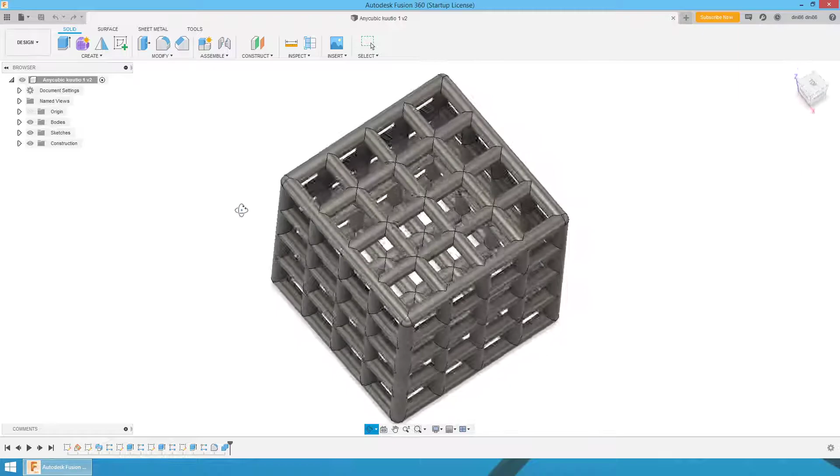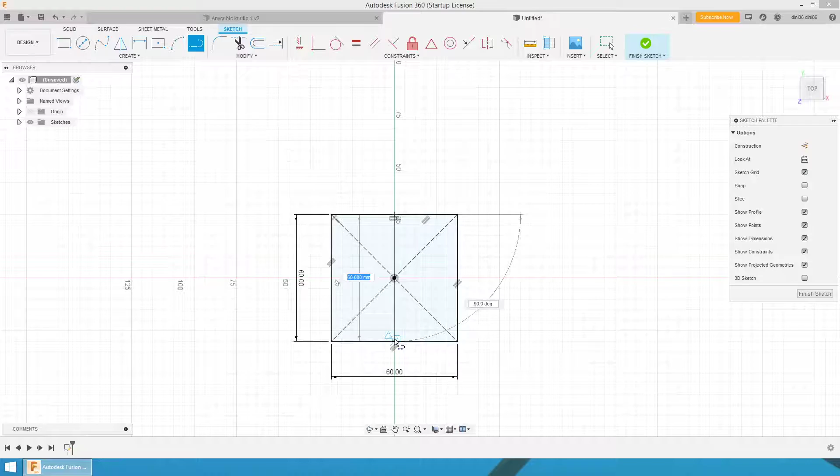And here is the finalized result, which we will try to replicate. So we start by making a drawing, a rectangle. I will make it 60 by 60 millimeters, and then we need to put a line in the middle like this. Finish sketch.

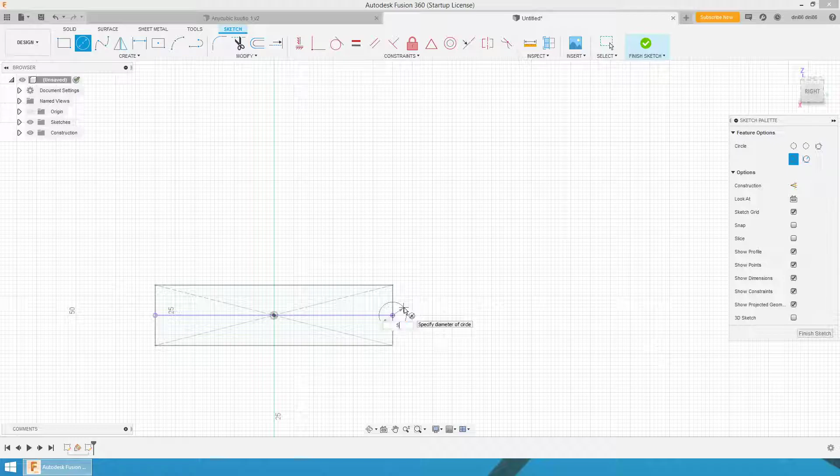Then we need to do a plane at an angle, and we will do it on this line, and then 90 degrees. Okay, and then another sketch on this new plane, and I will project, press P, and this line. Okay, I want the cube to be 5 millimeter, all the wires, so I make a circle which is 5 millimeters in diameter. Finish sketch, and then let's do a sweep.

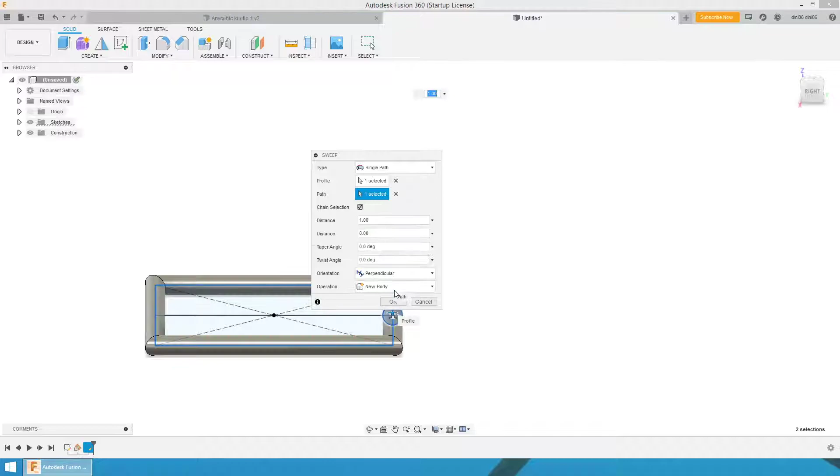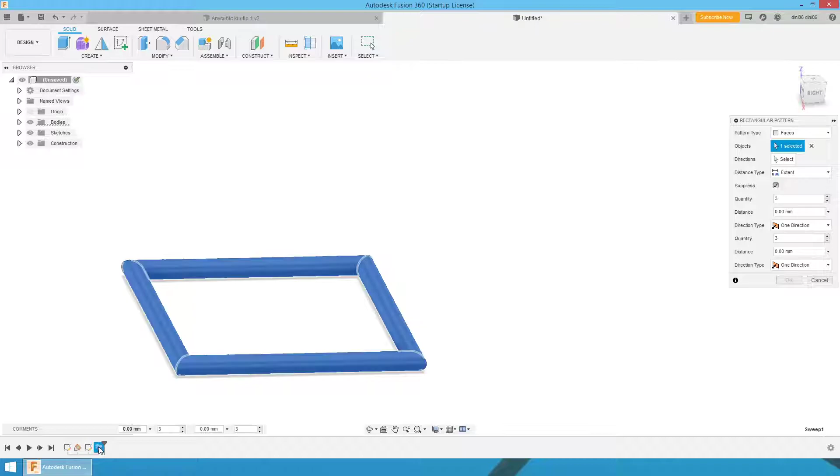So profile, we select this circle, path, this one. Perfect, like this. And we have 5 rectangles per side. So then we will do pattern, rectangular pattern. We will use this one as object, direction, up, and we want it to be 60 millimeters and 5 pieces. Okay, like this.

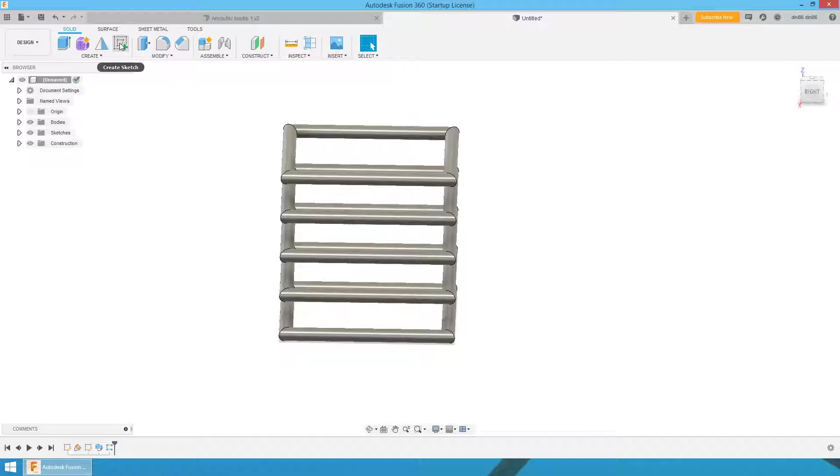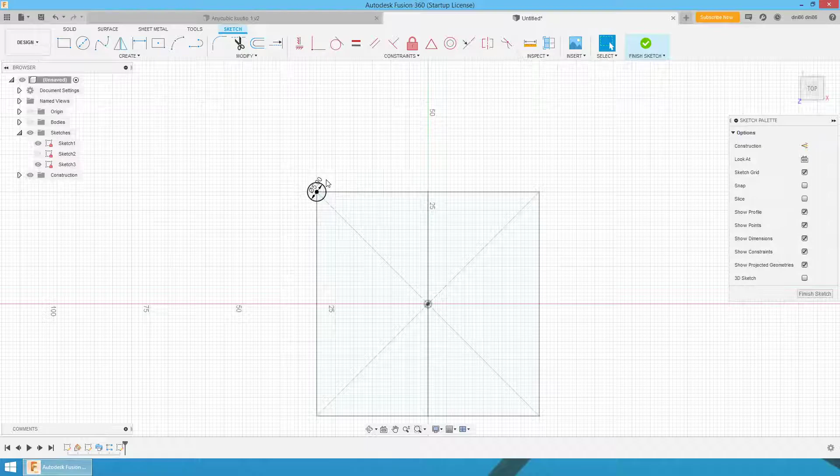Then we'll do another sketch on this same plane as where we started. We can hide the bodies, and then let's take the first sketch out like this. Then we will project again that point. Okay, and then do another 5 millimeter circle like this. Finish. And let's take the bodies back and then extrude this circle 60 millimeters. And now Fusion wants to cut it, so we need to change it to new body.

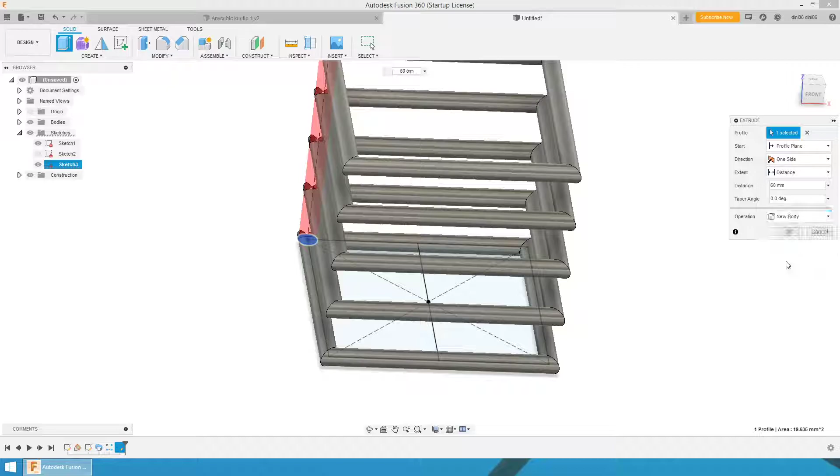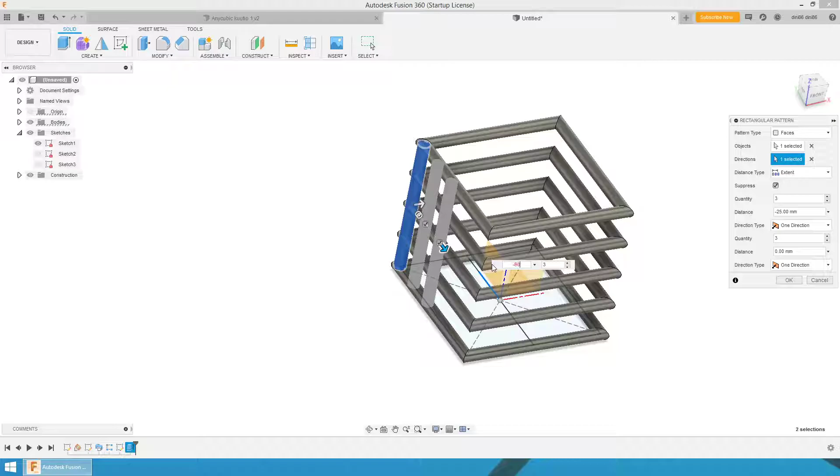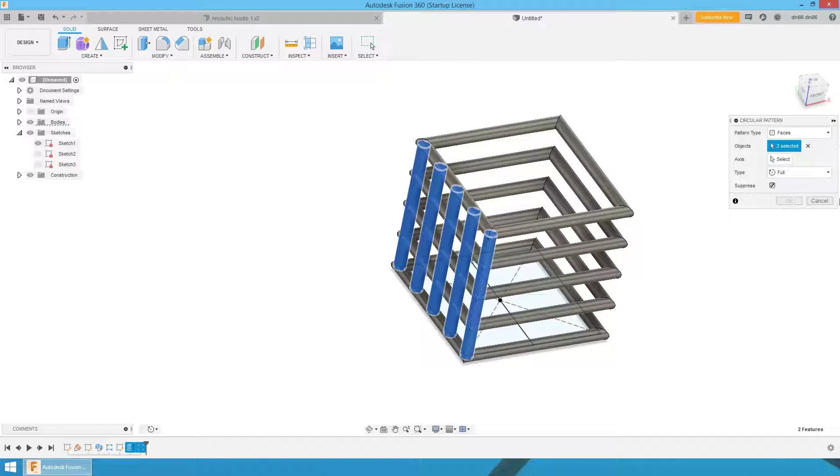Okay. Now we have one side, but we want to have many sides, so we will do a pattern, rectangular. Let's choose this one, direction. We want it to be Y direction, and then minus 60 and 5 pieces like this. And then to get it all the way around, we will do pattern again, circular, objects, this one and that one, axis, Z axis, 4 pieces. Okay, wow, look at that.

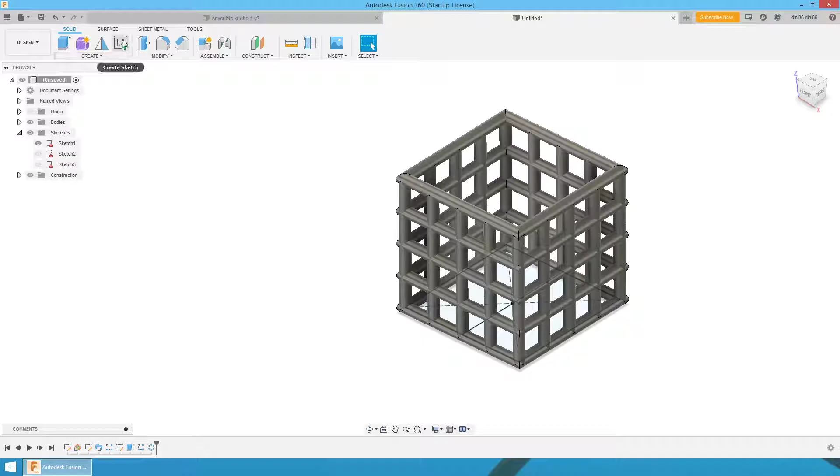And then we need to do the bottom and top. So let's do a sketch, and let's choose this plane. Okay, and then we need to project again this one. Okay, and then to make it easy, let's do a pattern again. Let's choose this one, minus 60 again, and 5 pieces like this.

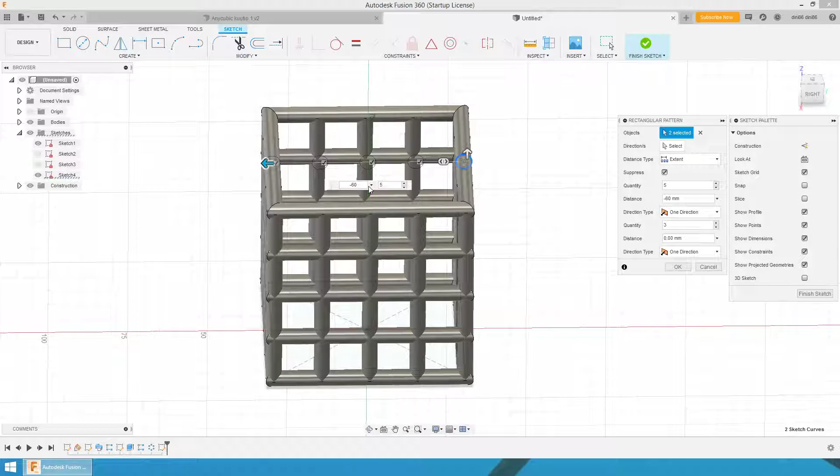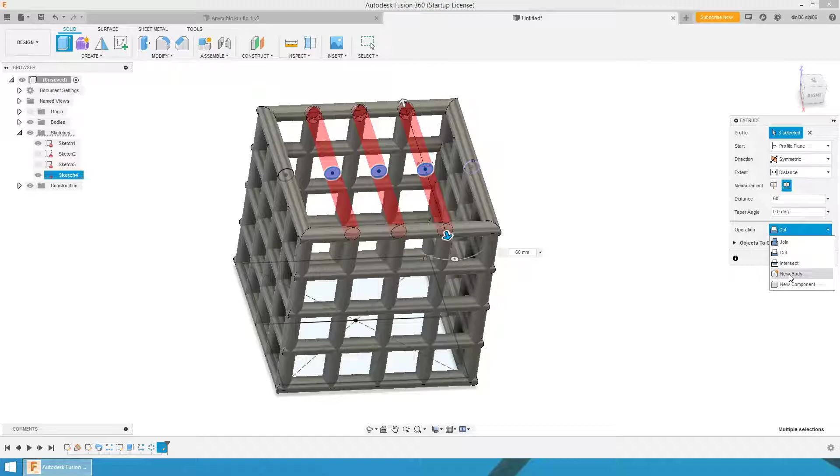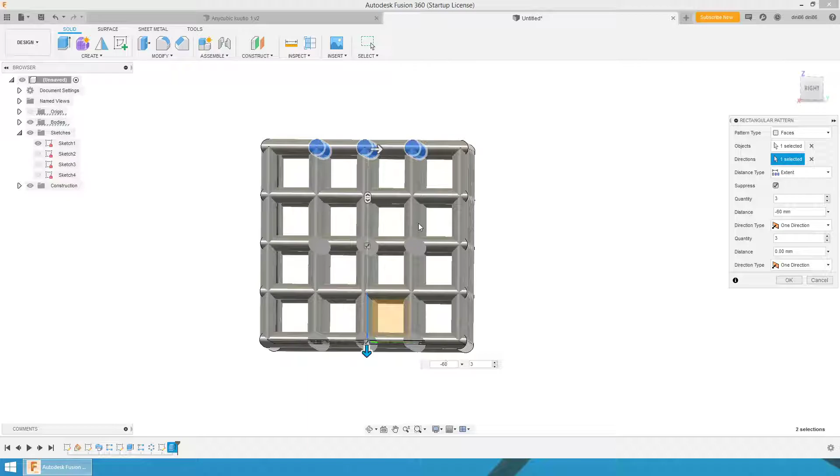Okay, finish, and then we will extrude this one, this one, this one, and we want it to be symmetric, and we want to use the whole length, and as you guessed, 60 millimeters. And again we want to have new bodies. Okay, and then we will do pattern again. This is quite easy. We choose the new one, direction, the blue direction, and as you guessed, -60 and 2 pieces. Okay, check it out, it's almost done.

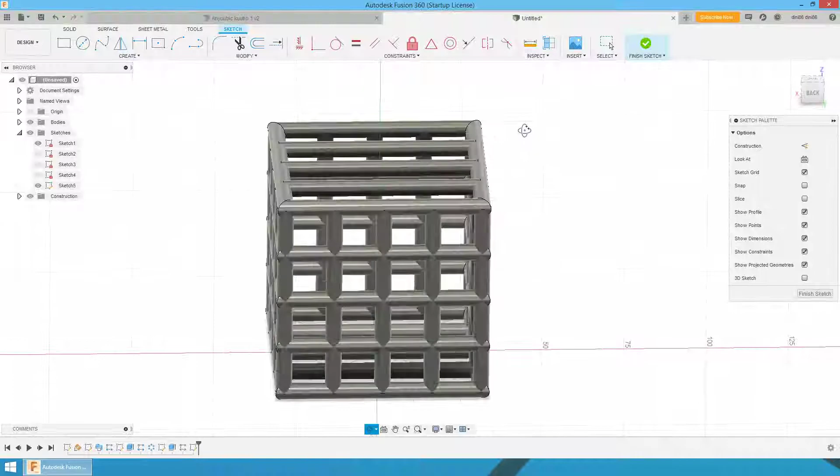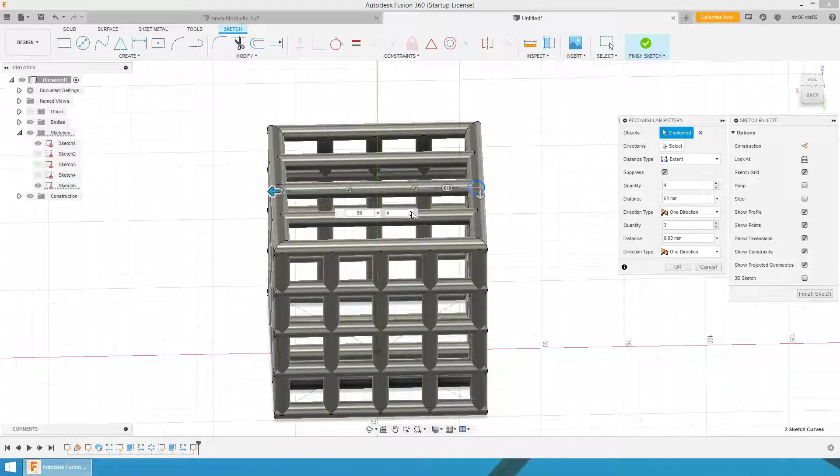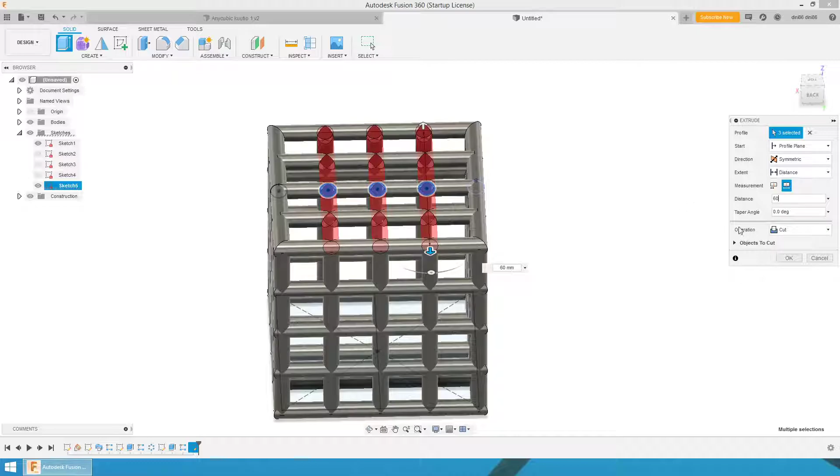Then we do these bars, so a sketch again. Let's choose this plane, and let's do the same as before. Project one of the legs. Okay, then create rectangular pattern, choose, and then 60 millimeters and 4 pieces. Okay, finish sketch. Let's choose them. This one and this one. Symmetric, whole length, and 60. And then again, new body. Okay. And now it's starting to look good.

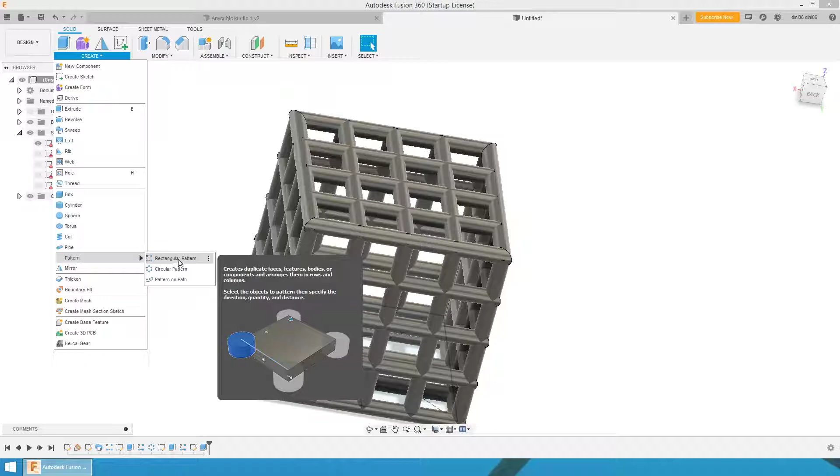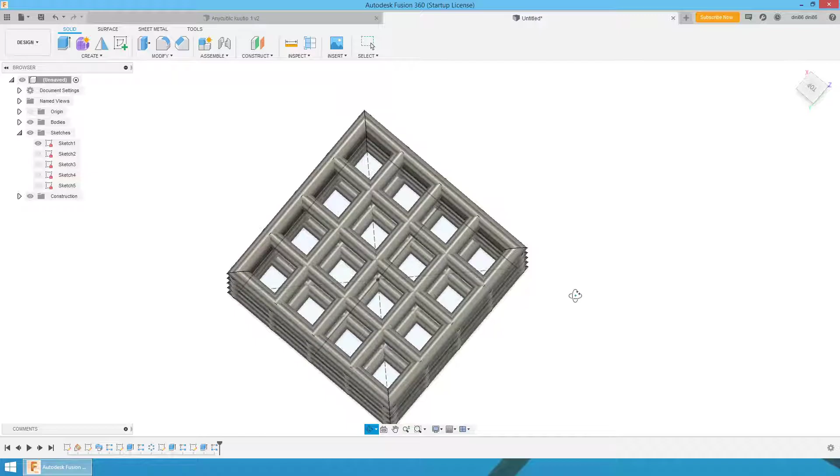And then again, let's do pattern, rectangle. Let's choose the newest 3 bars, direction, and we want to have the blue one. And again, -60 and 2 pieces. Okay, look at that. But now you see that we still have here, it's a little bit ugly.

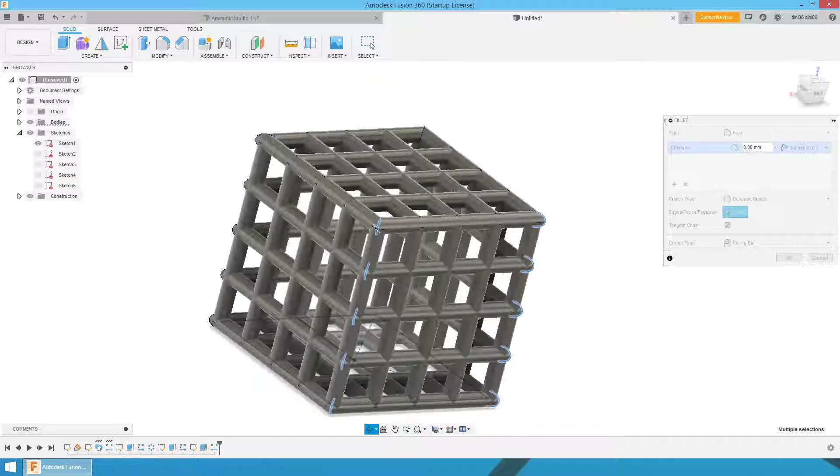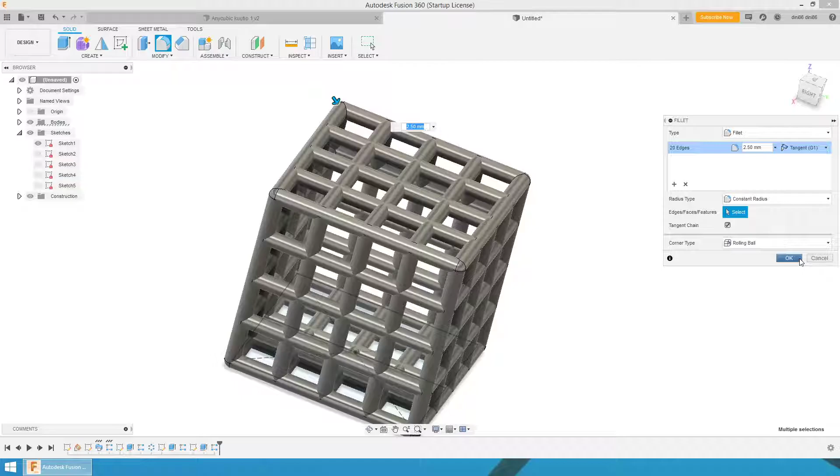So let's do a fillet, and then we will choose all of these. The other side also. A couple of more. Let's see, 2.5 millimeters. It looks quite good. Okay. And then we can hide that sketch.

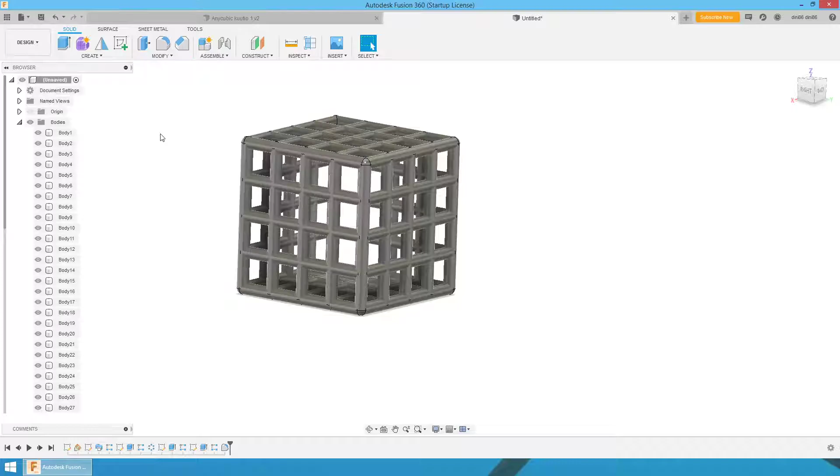It still looks a little bit rough. You can see these small black lines. And that's because we have a ton of different bodies. This many bodies. So let's combine them. Modify, combine. Let's choose the first one. Tool bodies. All the rest. All the way to 37. We don't want these. So then just OK. And look at that. The perfect cube.

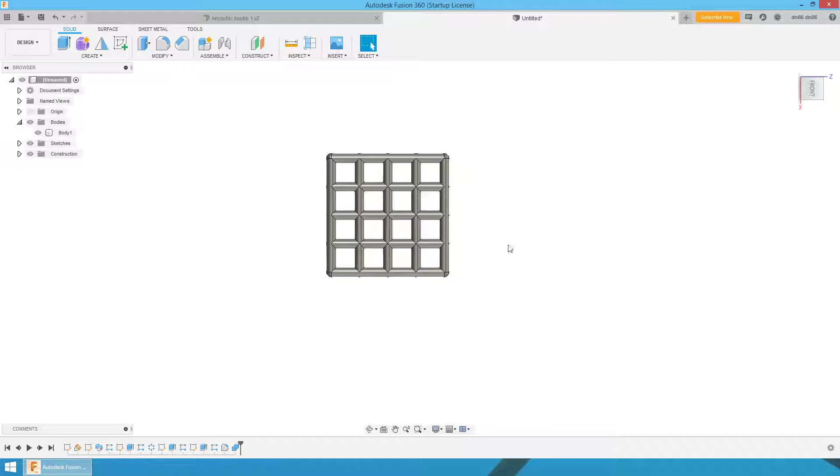Then if we want, we can make the base. But then that's a different story. We would like to have the base here. But you just add a plane in right direction, make a circle, extrude it, and then the same for the text inside. Piece of cake.